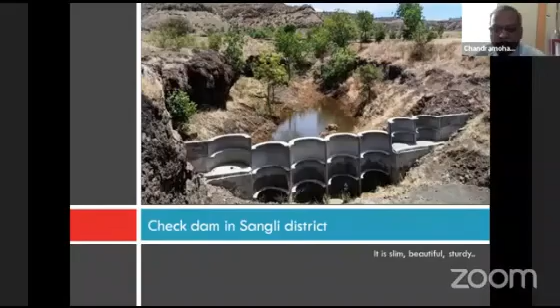So ferrocement is simply a skeleton of wire mesh on which chicken meshes are tied. To that shape, a rich cement mortar, say 1:2.5, 1:2, or 1:3, depending upon the design, has to be press filled. Water cement ratio should be less than or up to 0.45.

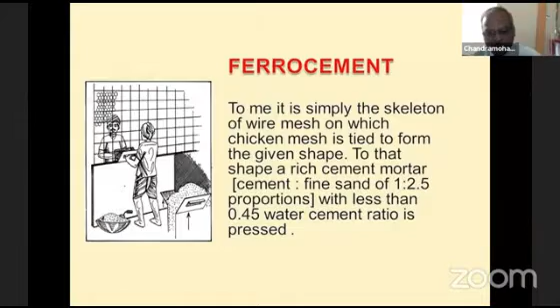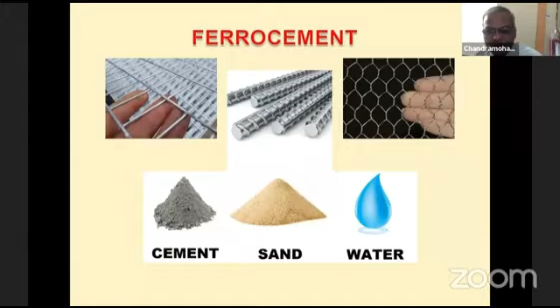Cement one part, some 2 or 2.5 or 3 parts of sand, and water. That is the mortar. Cement mortar is to be applied to the skeleton of these layers of chicken meshes. What we eliminate is coarse aggregates. No formwork, still you are giving curvature shapes and all these things? Yes, the answer is yes. We are giving the shapes because of the skeletal shapes.

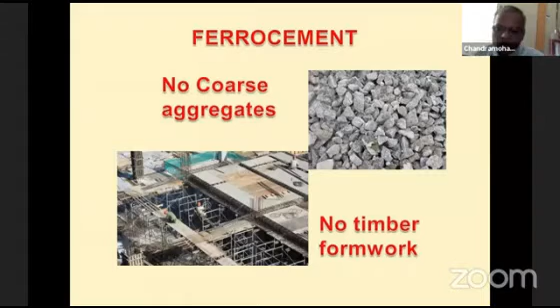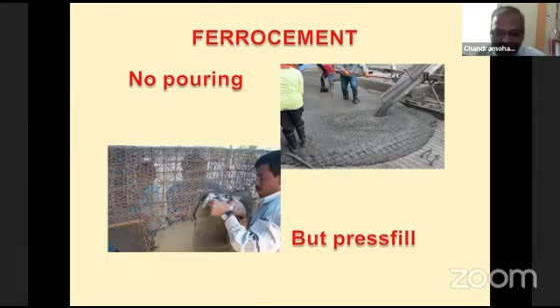The shape of the skeleton is such that we do not require the formwork or any timber planks or any centering plates. The skeleton you can see in the photo, the men with their trowels are there from both sides. One is pressing from the other side, and the mortar is pressed inside the gaps between the layers of the chicken meshes. The thickness is normally 20 millimeter, 25 millimeter, 30, and at the most you can go to 50 millimeter.

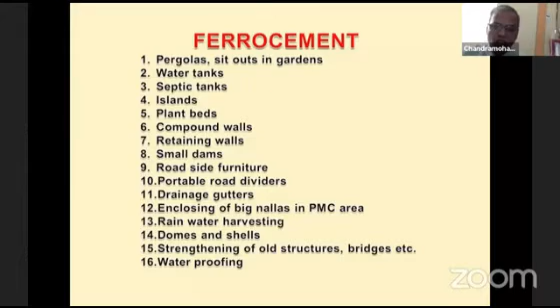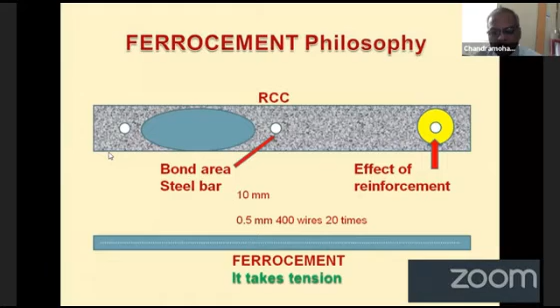If the bond is more, bonded area is more, the transfer of stresses or forces from one matrix to the other, from steel to mortar or mortar to steel, definitely increases in efficiency, and you will appreciate that 20 times more means ferrocement can take tension. Concrete doesn't take tension. In RCC, we allow some 7 or 8 kg per centimeter square as tensile forces for designing. In ferrocement, you can go up to 85 to 90 kg per cm square. That means a number of small diameter wires increase the bonded area between the matrix and reinforcing steel wires. So we say that ferrocement is very close to nature.

How RCC behaves, how it fails, how ferrocement behaves, how it gives more strength, stress versus strain. This is the first black dot on the curve. Here concrete fails, stops taking further loads. But beyond this first black dot, ferrocement continues to take stresses, and this portion is called the multiple cracking development zone. Ferrocement takes the load up to the next black dot, and then the steel yielding point is there, and it yields and stops taking tension. You can imagine the energy absorbed. Just calculate the area below the graph up to the x-axis, and you will see how large the area is. That large area is nothing but the energy absorbed.

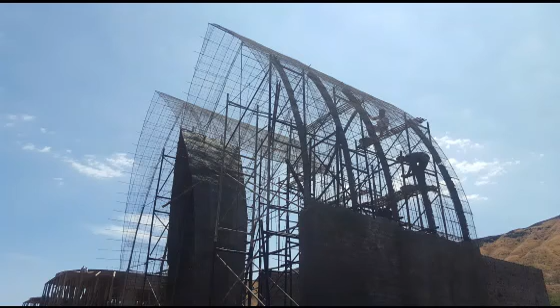Definitely there is a difference between cement concrete and ferrocement. The designing methods are altogether different. The philosophy to design cement concrete components is that concrete takes compression, steel takes tension. In ferrocement, if you add these two materials, steel meshes and cement mortar, it is not just addition. The composite that is called ferrocement has got some additional properties. It is not just the addition.

These are earthquake proof structures. So why is it earthquake proof? Because it is a homogeneous structure. Concrete, I call a heterogeneous material. A ferrocement component is a homogeneous thing.